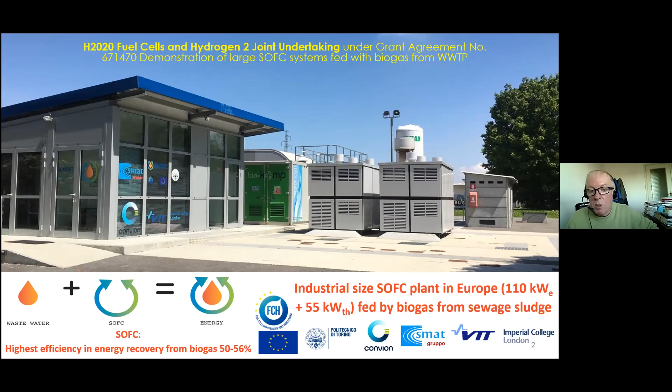I'm talking about efficiency - electrical efficiency specifically, which is very high. I will show you the results, but we are moving between 50% and even more - we have reached 58% electrical efficiency from biogas to AC electricity. At this size especially, this is an impressive result for people expert in electrical production.

This is the plant. It has been installed in an already existing wastewater treatment plant - we did not build the wastewater plant, but the solid oxide part. So from the gas holder on, there is the new plant you see in the schematic. First we have to treat the biogas, because it contains contaminants that can contaminate the catalyst of the fuel cell anode. So there is a first biogas processing system that I will show you.

Then there are the fuel cells - 3 modules of fuel cell. I'll just say that at the end we were only able to install 2 modules, not 3. It's a long story, not significant for today. So in place of 3 modules we have 2, but the concept is the same - producing electricity at high efficiency. For all the modules, there is a recovery of thermal power.

The thermal power is given to a first loop with water and glycol-ethylene that exchanges with a secondary loop, in which the heat is then given to the sludge before it goes to the digester. So the heat is recovered in order to preheat the sludge, which is a necessary activity in a wastewater treatment plant. So the energy recovery is complete.

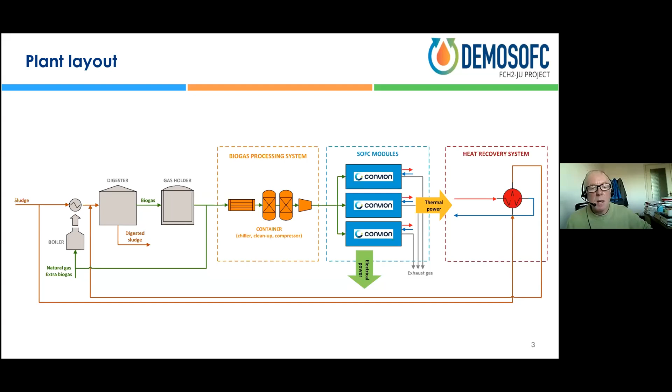The fuel cell also uses compressed air for operation, produced here, and finally there is the electrical connection with the grid interface internal to the plant. I can say that all the electricity is used inside the wastewater treatment plant - economically it's better to self-use the electricity produced compared to exchanging with the grid. It's only an economic balance, depends on the local rules. In Italy, it is better to self-use the electricity inside, and the consumption was enough to absorb all the electricity produced.

And then there is the hot water that has been produced as a recovery, as I said, to preheat the sludge.

I'll show you some pictures about the evolution of the work, because we started from scratch. It's a real industrial installation, so it's a good experience - a fundamental experience for the future, I think.

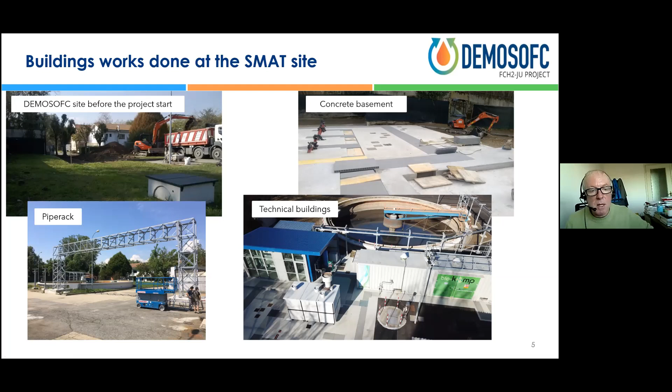So you see some aspects of the work when we built the system. As I said, biogas is a good fuel because it's renewable and contains a high molar fraction of CH4. Still, it contains contaminants coming from the biological sector. The worst contaminants, the ones that can be more dangerous for the catalyst in the anode, are basically the sulfur compounds, mostly H2S, and the silicon compounds, the siloxanes.

On average, we can have in this biogas an average of 28.66 ppm of H2S, quite good, quite low in terms of contaminant content, and around 4 milligrams of silicon per silicon equivalent per cubic meter, with a peak of around 10. So these are the values we have to deal with. Of course, they change during the year because of the variability of the meteorology, but anyway, you have this value to deal with.

So, deal with it in which way? You see the targets for the solid oxide are very strict, somebody can be impressed. For H2S it's 30 ppb, parts per billion, and for siloxane, even worse, 10 ppb. So it means essentially zero, totally cleaned.

I have a lot of experience at the lab level, and I can say that the classical anode of a solid oxide can resist around 1 ppm of sulfur without structural degradation. Anyway, the target was very strict in order to not fail this big demonstration simply for a problem of contamination. So these strict targets have to be reached because of the importance of this plant, but they can be relaxed.

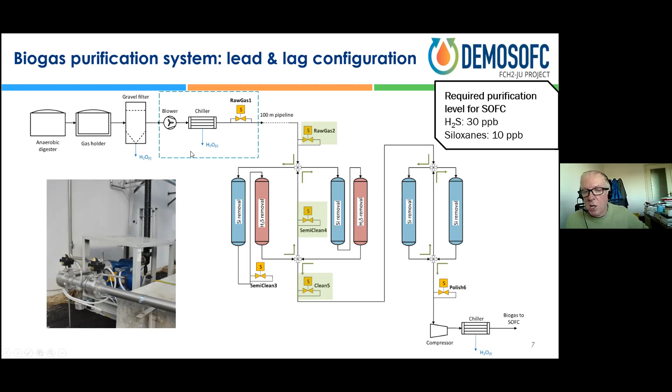Then there is what's called a lead and lag configuration, using activated carbon dedicated to the separation of sulfur on one side and organic silicon on the other side. So there are two vessels in series that separate sulfur and silicon.

Then there are measurement points for the quality of the gas that tell us whether or not to switch. When measurement number 4 shows that the contaminant has slipped across the bed, we perform the lead and lag switch: the lead becomes the lag, and the lag becomes the lead. This ensures continuous operation.

Here is a picture of the vessel containing the carbon, which we designed at Politecnico and built with a company in Italy called Biokomp. And here is the container holding the whole system for decontamination of the gas, so the gas that finally goes clean to the anode of the fuel cell.

Here is an interesting aspect: the electrical connection to the grid, the internal grid of the wastewater treatment plant. You see where the fuel cells are connected to the low voltage line internal to the site. There is also a connection to the external medium voltage line, but as I said, we never used it for economic reasons. Then, of course, the power is distributed to the whole system.

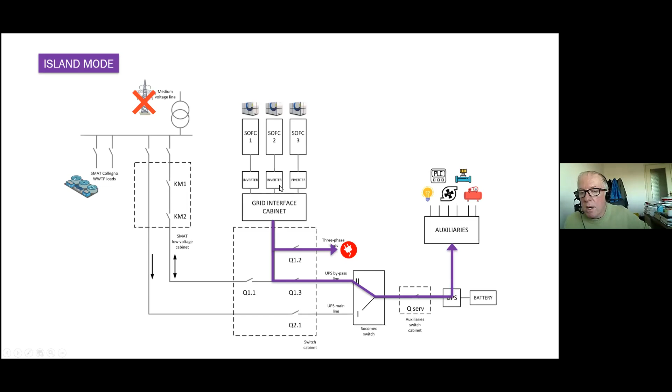The fact that the machine, the solid oxide, can go in operation in island mode means it's possible to go in island in case of a blackout. The machine continues to work, and of course, with the biogas, it can supply the electrical system in island mode. This has been very appreciated by the end user, so it's a good point to outline in this presentation.

Thermal recovery, as I said, is a complete recovery using water and glycol ethylene as a first loop. The exhaust gases are at around 200 to 250 degrees, so at this temperature it's interesting - we can make better use of this high level of thermal energy, because it's not 50 degrees, it's 200 degrees.

Still, the interest in the plant was only to preheat the sludge, as I said. So at the end, we use this 200 to 250 degrees to preheat the water from 45 to 70 degrees, and then use that to preheat the sludge. So you see there is a thermodynamic gap, but it justifies this type of use. We preheat the water at 70 degrees, and then the water is used to preheat the sludge at 40 degrees for using the sludge to make the digestion in mesophilic condition. So this is the recovery.

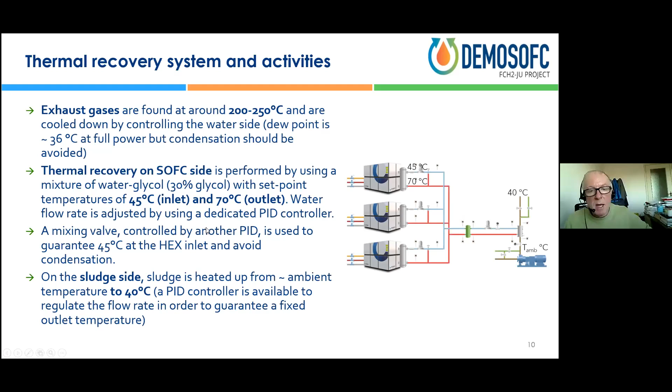I'll show you some details: the pump for the circulation of the water plus glycol. And here you see the tube and tube heat exchanger, at the bottom, where we make the exchange between the water plus glycol and the sludge that is preheated. All has been done from scratch.

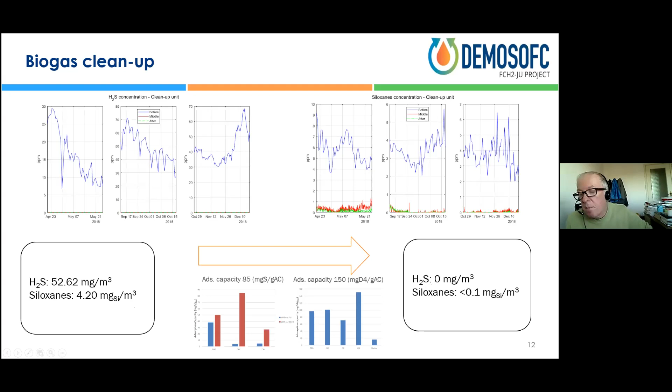Summary - so we go to the results. Decontamination: you know the values we started from, around 50 milligrams per cubic meter of H2S and 4 milligrams per cubic meter of siloxane. This was the average over the year, in the 3 years that we used the machine. The result of the decontamination was 0 sulfur and lower than 0.1 milligrams per cubic meter of equivalent silicon, below the detection limit, let's say. So the decontamination was okay.

And 2% of the time it worked between 55 and 60% efficiency. The top we reached was 58% electrical efficiency. Everybody here who is an expert in electricity production from biogas knows that with an internal combustion engine at this size - I'm talking of 50 kilowatt - the best you can reach is around 40%, or 42% if it's a very good machine. Here we are talking above 50%, with a peak of 58%, okay?

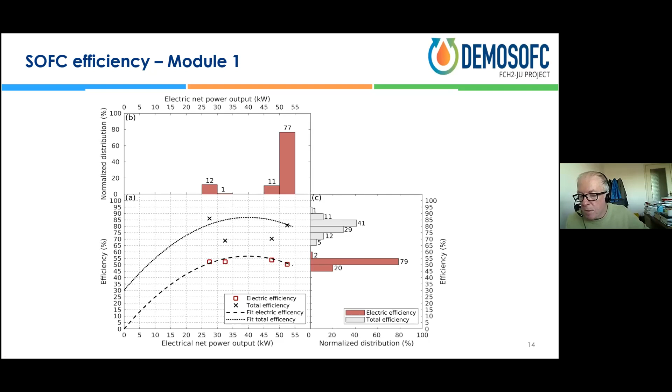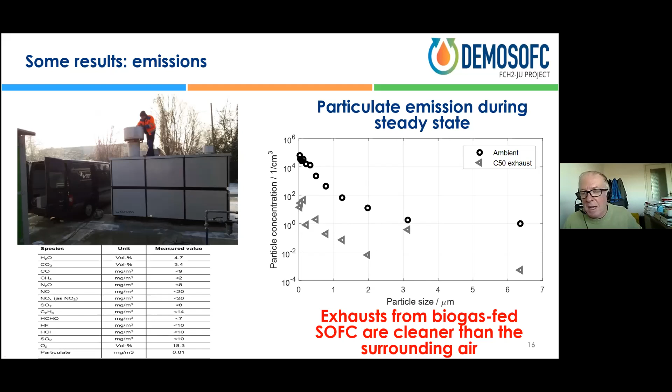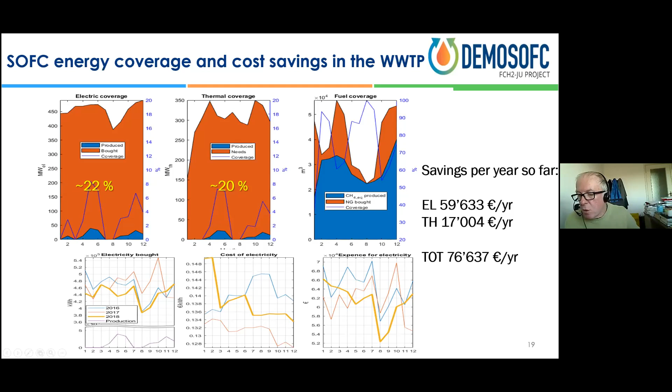So the point is either to produce more biogas with higher merceology, or on the other side, to reduce the consumption inside the wastewater treatment plant. Both are approaches that we are investigating for the future. Anyway, this small plant in Collegno was able, thanks to the fuel cell, to recover around 70,000 euro per year of savings.

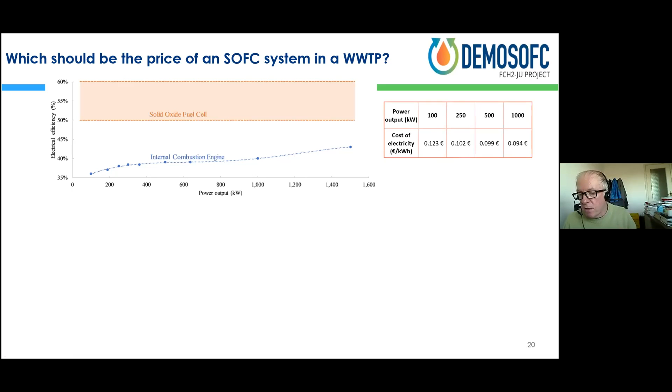This is the cost of electricity produced by an internal combustion engine using biogas. Of course, it depends on the size. 100 kilowatts is around 0.123 euro per kilowatt hour. 1 megawatt is less, 0.094 euro per kilowatt hour. This is the situation with an internal combustion engine. So how much does the cost of a fuel cell per kilowatt, the unit cost, have to be in order to become competitive with the internal combustion engine without any subsidy?

There is not a market. So already now there is a gap to recover of around 1,500 euros. It's not so much. So I have a very good expectation for the future of this technology in this type of application.

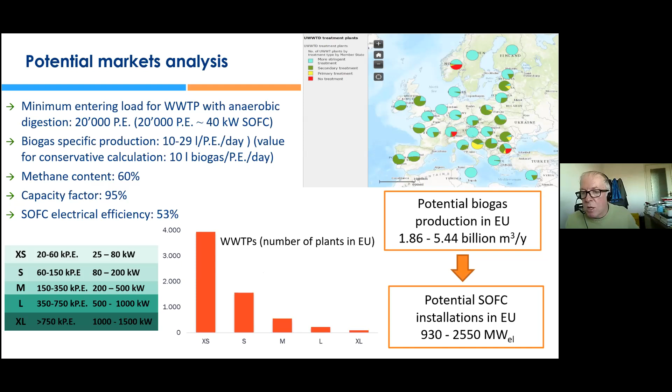So it's an early market, yes, but it's a huge early market. So there's a large possibility to install this type of system in place of the internal combustion engine in the coming years. Finally, I show you a video of this. I hope you can see.

I don't know if you hear the voice, but I can talk over the video. So this is the wastewater treatment plant. This is the solid oxide. Top view, you see the plant that we have built. The first industrial plant in Europe, as I said.

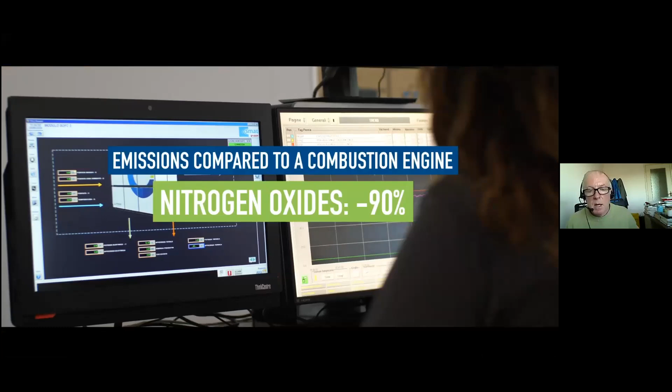So you see the pathway of the biogas going to the fuel cell, the production of energy. So around 100 kilowatts installed. Electric efficiency higher than 50%. This is the control unit. Basically, no nitrogen oxide, no sulfur oxide, as I said.

So to save resources and reduce emissions, this is the target that we have as researchers for the future of energy. And this is one way to reach this type of target. So I conclude here. I hope to be in time.

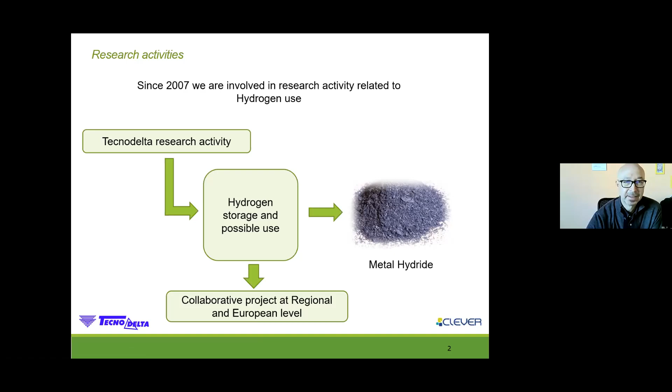In this case, we have worked with metal hydrides, and we decided to put on the market this project, named Clean Drone Eye, because we put in a lot of things that we learned during the years with hydrogen. The aim of this project was to demonstrate the feasibility of manufacturing a drone complete with a hydrogen production system and a refueling station.

Here you can see a drawing of the project. The idea is to use alternative energies to produce hydrogen with electrolyzers. Then we have a system to compress the hydrogen that is produced, and at the end we can put the hydrogen inside a tank that is installed on a drone.

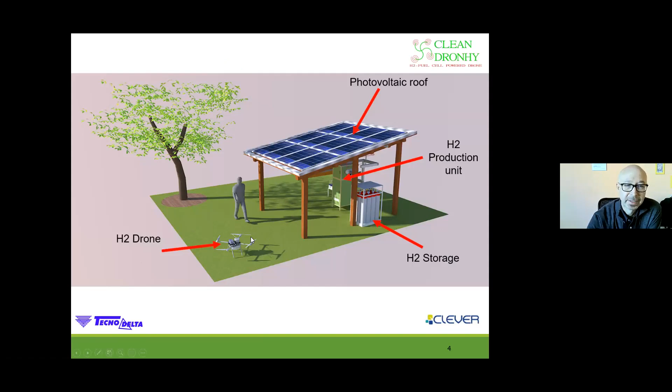The partners. So the project is a collaborative project financed by the Piedmont region. The partners are quite small companies, and we have also the involvement of the University of Torino. So I'm talking as project coordinator. I am part of Tecnodelta. We were in charge of making the production and refueling station.

Then there was another company, named Stones, that was in charge of building the hydrogen drone, complete with the fuel cell. And then another company, a very small company, Microtex, was in charge of the electronic management of the fuel cell.

Then, in the project, the University of Torino with the chemistry department was in charge of studying the compression system with innovative technologies, making tests of these compression systems and making the LCA of the system.

Going into detail, as I told you, the idea was to test the complete chain from production to use. So starting from the production with the electrolyzers, then we put in place a small purification unit in order to have good quality hydrogen to feed the compressor.

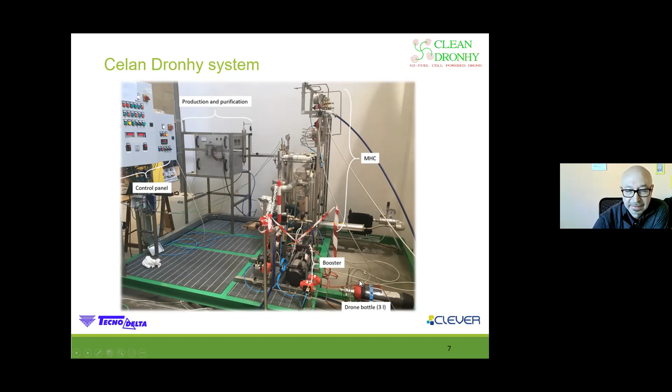The electrolyzers. So the production uses standard electrolyzers with a delivery pressure of 30 bar. The power supply could be a photovoltaic system, as we saw in the first image, or of course directly connected to the grid at 220 volts. Then at the end of this system, we have a purification stage with a cartridge with zeolite inside.

Then at the outlet of the electrolyzers, we have this first stage of compression. Here you can see the complete performance of the compressor, made of metal hydride plus boosters. We reach a flow of 150 normal liters per hour. We filled a cylinder of 3 liters capacity. This is geometrical capacity, and we reach a maximum pressure of 300 bar.

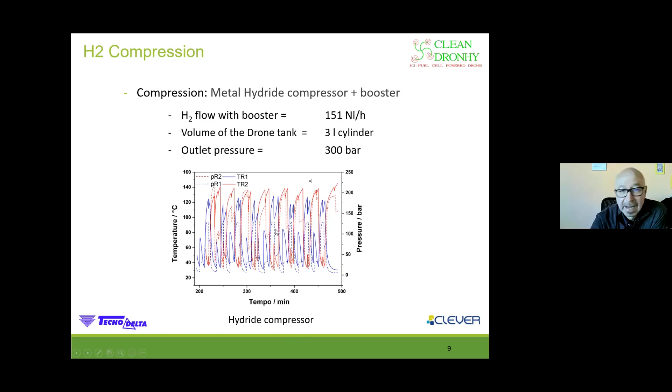Here you can see an image of the hydrogen compressor. Here you can see the monitoring of the pressure of the first stage reactors and the second stage reactors and the temperatures. Now I'm going to show you how the compression works. It is really quite simple.

So, as I told you, we use metal hydrides. We have 2 reactors. We put metals inside the reactors. We have a thermal fluid around the reactors. The hydrogen goes inside the metals. The thermal fluid keeps the temperature under control. In this phase, we are in the absorption phase, which happens at low temperature.

So if we have a look here, we can see which point we are at. We are at this point here during absorption. Hydrogen comes in, we have the phase transition in this phase, and then we have the complete filling of the reactor in this part of the curve here. Then once the reactor is completely filled with hydrogen, we can increase the temperature inside the system, again with the thermal fluid, and then we have the hydrogen desorption.

So we move from this point to this point here, and we have the hydrogen release. As you can see here, from point A to B, we can move to this point. And so we have a stage of compression. As I told you, we have two stages. The first stage has an inlet pressure of 30 bars and an outlet pressure of 130 to 140 bars. Then the second reactor has an inlet pressure of 140 bars and an outlet pressure of 220 bars. So it's quite an innovative system.

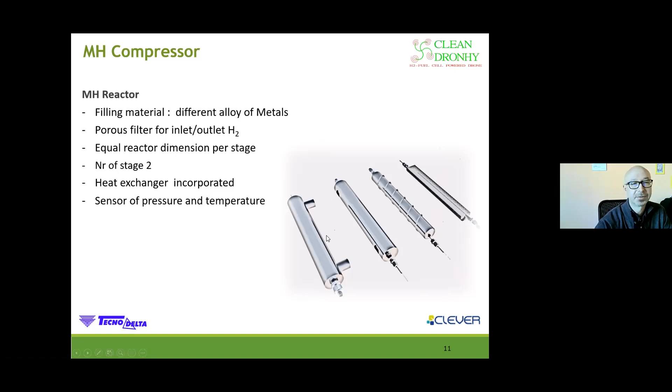The dimensions of the two reactors, first stage and second stage, are the same volume. As I told you, we have two stages. The heat exchanger is incorporated. We have the thermal fluid that comes into this part of the reactors. And of course, we put inside the system some sensors to monitor pressures and temperatures of the system.

At the outlet of the system here, we have the connection with the booster. As I told you, there is a standard gas booster. We have compressed air to drive the booster. The pressure that comes into the booster is 220 bars, and the outlet pressure is more or less 300 bars. That is the pressure we use to fill the tank.

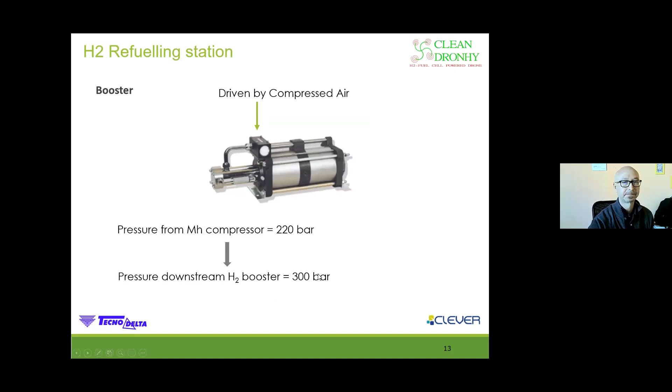About the electricity production on the drone itself, we have used a PEM fuel cell. It is a standard one, very lightweight. We did an analysis on the market and we found that this one is very useful because it is very lightweight, as I told you.

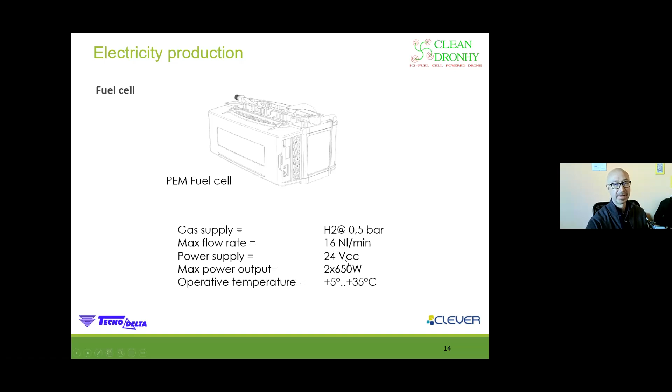The gas supply comes inside the fuel cell at 0.5 bar. We have a maximum flow rate of 16 normal liters per minute, and the power supply that we get from the fuel cell is 24 volts DC. We decided to put on the drone two fuel cells of 650 watts each, and we have operative temperatures from 5 degrees to 35 degrees.

The fuel cells we put on the drone were two. So the company involved in the project, Microtex, was in charge of managing the electricity coming from the two different fuel cells. They developed a system in order to have the same load on the two fuel cells. It's very important to balance the load, not to have too much from one fuel cell compared to the other. So they developed this electronic unit to manage the system.

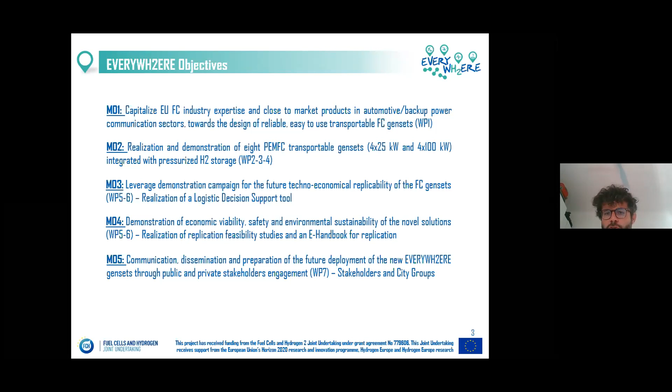Generally speaking, the demonstration campaign, which is the main objective of this project, can be valorized not only for itself but also for other activities, like the evaluation of the logistic feasibility and the logistic campaign to transport the genset here and there, the evaluation of regulatory aspects, and also the evaluation of economic and business modeling to launch these products on the market.

When we started this project, we saw from the beginning some challenges, like the fact that we are going to realize a first-of-its-kind product made by an orchestra of partners, and also the fact that it was important from the beginning to identify what could be the main target market for the exploitation.

I'm telling this because I know this event is very targeted on this topic. For example, we soon identified that there is no competition, unfortunately, between diesel gensets and fuel cell gensets from the CapEx point of view. But particularly looking at specific markets where gensets are used, for example the short-term rental market, which is mostly dedicated to providing power to events, in this type of market where the CapEx, the capital cost of the system, is not so heavy, it is possible to have a remunerative business model.

Also because, at the end of the day, in the final cost to the end user of the genset rental, the cost of CapEx and its amortization and depreciation is really a minimum part, because the major part is logistics, shipping, fuels, etc. In this type of contract, for example, our EVERYWH2ERE genset can have a higher cost of only around 10%, but providing real added value in terms of reduction of emissions towards zero and a reduction of noise and bothering.

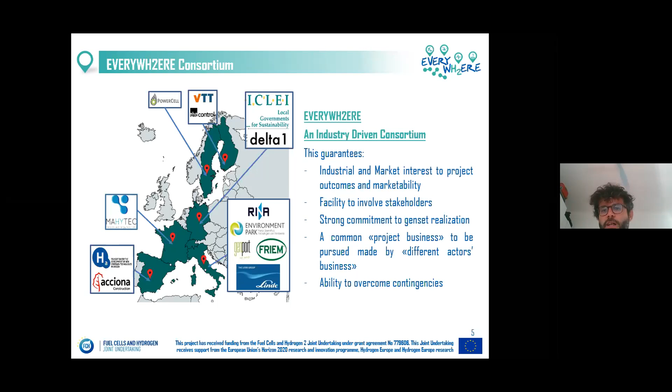Here you can see also other key partners, like THT Control, who supported us in the mechanical integration of the solution, D1, which is the Green Music Initiative Association, supporting us in promoting the genset at music festivals, and Acciona, who will host some of our gensets at its construction sites.

But why can the Everywhere hydrogen genset be more beneficial than other clean energy solutions? I already said something about this. For example, compared to diesel gensets, diesel gensets have an environmental and social acceptability bias, but at the same time they are more reliable and can operate for extended runtime.

If we look at current market solutions, the main competitor is a battery-based containerized system that has one main issue related to extended runtime, since replacing and refilling can take so much time. So from this point of view, the fuel cell-based hydrogen system can be a sort of compromise between a battery-based solution, which is clean but has some bias, and the diesel one. In this sense, we started to think about guaranteeing easier operation in terms of regulatory aspects.

We started to think about how to structure our system, how to structure our genset, and we thought about having something quite easy to be installed, plug and play. So, for example, a distribution socket panel very similar to the diesel genset one, and we thought to operate with a two boxes solution, one box related to the hydrogen storage and one box related to the fuel cell subsystem as it is. We planned and designed it on paper.

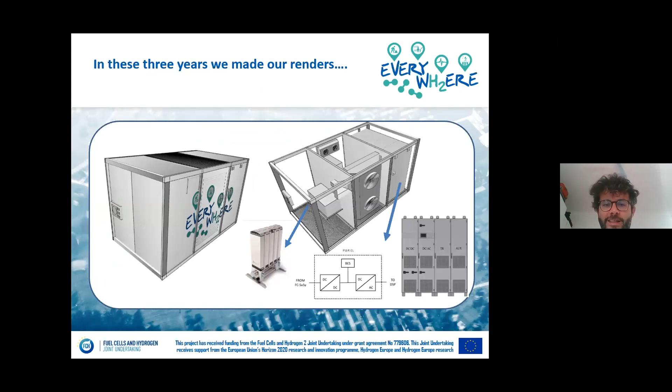As you can see, it is divided into 3 rooms: one dedicated to the fuel cell, separated from the power converter one, with a room in the middle where the thermal management system is embedded. We thought about it via render, but we already realized the first 2 prototypes that you can see in this picture, and that you can visit virtually, unfortunately so far, on our website, www.everywh2ere.eu, where you can make a visit of our genset.

As you can see, we are talking about something between a 10 and a 20 feet container, very similar, particularly in terms of distribution socket panel and interaction with the end user, to any other type of diesel genset on the market.

It's also something easily transportable by a truck. This genset, the first box, is directly connected to the second box, which is a bundle of pressurized hydrogen storage able to operate up to 525 bar, and easily refuelable by a gas truck or even, in presence of pre-cooling, at a hydrogen refueling station.

So where we are now: as you could see, we have realized the first 2 prototypes. We are currently realizing the following one and finalizing the commissioning tests of the first 2 prototypes, because we would like to use them in demonstration, since demonstration is crucial.

As I said, we will perform the first test in summer 2021. Unfortunately, due to the pandemic situation, we couldn't start them earlier, but we are very motivated to start since summer 2021.

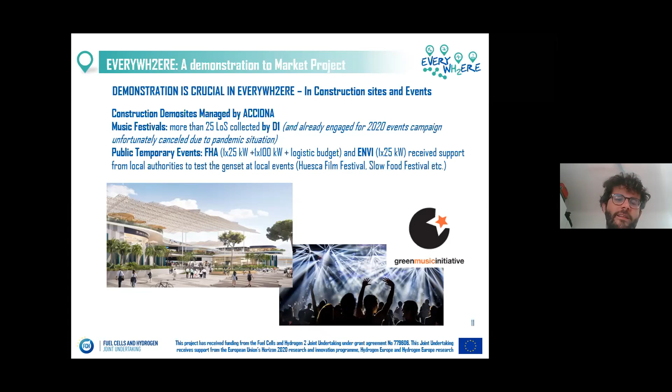So what I would like to say today is that it's very important for us to get in contact with you, not only to know more about your interest in our genset, but also to understand if you would be interested to use our genset next summer 2021, but even in 2022 and in 2023, because the project, as you know, will go farther up to 2023.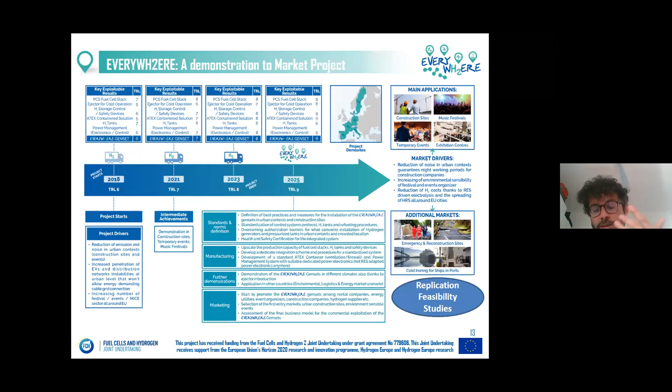So it's very important to contact us, not only to host the demonstration, but because, as I said, the demonstration is very crucial to bring our solution to market as soon as possible. We are targeting 2025, and we are motivated to do so because we are already receiving a lot of expressions of interest.

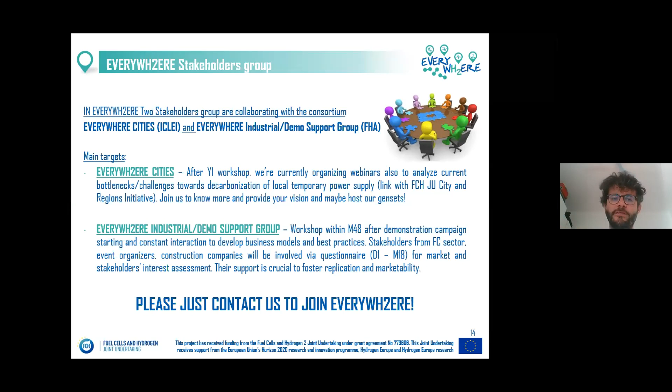So please join us, contact us via our website, because there could be the possibility to host our demonstration, but also to participate. For example, if you are a public authority, a consulting firm, or a research institution connected to cities, also join our Everywhere Cities working group, which is studying, thanks to ICLEI support, how to facilitate from a regulatory and policy point of view the use of our Everywhere genset in European cities. Here are some activities we are doing thanks to the Cities and Regions Initiative with ICLEI.

So please, if you would like to join us, get in touch with us, follow us on social media, follow us on our website. And if you would like to host a demonstration, feel free to contact both of us at RINA and at Environment Park. Thanks a lot for your time.

Thank you, Stefano, for your presentation. You really showed very clearly that, unfortunately, environmental advantages of technologies like hydrogen technology do not automatically mean that these technologies are used and widely applied. This does not mean that all barriers are automatically solved. You clearly talked about social acceptance, regulatory barriers, economic aspects. This is why the identification of entry markets for hydrogen technologies and demonstration, as you clearly told us, is very important, and demonstration is a crucial step. On our side, we can confirm that from our observatory, private and public organizers of events are really interested in this possibility. So we hope that we will soon see the first results of this demonstration project.

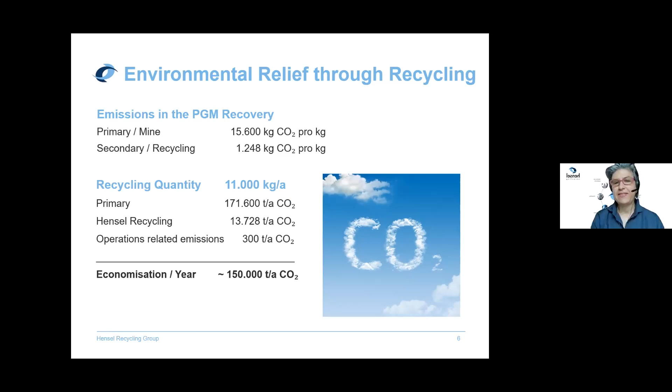We made a small contribution to this recycling, and you can see it here. It is equivalent to 11 tons of precious metals that we recovered, mainly platinum, palladium, and rhodium, from exhausted catalytic converters. This, of course, reflects in a reduction and economization of the overall CO2 emissions, because the secondary recycling of precious metals also produces emissions, but they are largely inferior to the ones produced by the primary source. This is equivalent approximately to 150,000 tons per year of CO2 less.

Coming to the topic of today, I would like to offer you an overview about the chances which the market hopefully will provide for recyclers of fuel cell components.

So Asia is dominating in this scenario. Europe shows its main producers, like Daimler Chrysler, introducing a fuel cell electric vehicle plug-in battery hybrid, and BMW is a little bit more cautious, moving towards fuel cell electric vehicle deployment. But between these regions, there is a full supply chain from catalyst through to recycling, and European players, in our opinion, may find it hard to gain a stronghold in these regions.

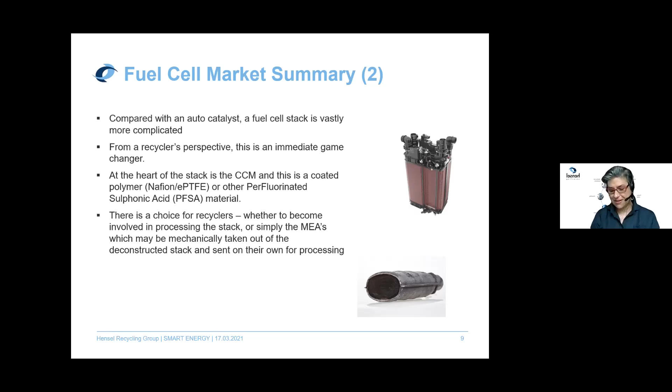The upshot of all this is that the recycling process will be very different to what is practiced today. We think new relationships, partnerships, and expertise will be required to stay in this game of processing automotive PGM. It will take some time for this to be put in place, and the best time to begin is now. That's one of the reasons we are here today with you.

In the next slide, I am offering you an overview again of regional markets, in this case Europe and North America. Asia, as we have seen before, dominated shipments in 2017 with almost the totality of production, and Europe is very much behind, at least in terms of megawatts.

But it is true that in megawatt terms, Asia has always competed for the lead with North America, which enjoyed almost half of the fuel cell market by megawatts. Asia sat in second place with 45%, although its actual production share is higher, and some of that is being exported.

Coming to the recycling opportunities from a regional perspective, the figures we have published so far relate to domestic sales, but exports from Asia are increasingly significant, especially towards North America and to a growing degree also Europe. This is very important for us because, from a recycler's perspective, the country of shipment matters for production scrap, but the country of sale matters more for recycling.

In the country where these products are going to be sold, we have the best chances of doing business with the end companies. On this basis, the vast majority of opportunity currently lies outside Europe.

Many of the stationary projects are based on PAFC, whereas in North America the deployment of SOFC seems to dominate. Therefore, the Asian region has opportunities for PGM recyclers, both in PEM fuel cell transport units and PAFC stationary units.

I must add, perhaps I should have said it before, that we at Hensel Recycling are actually focusing strictly on PEM products, because our industrial core is the recovery of platinum group metals, and we are not interested in technologies that do not bear precious metals to be recovered. So our focus is a little bit of a tunnel focus on PEM fuel cells, as we see from this other slide.

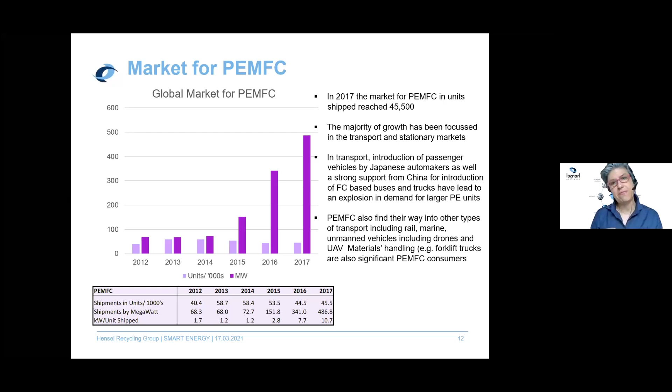Important for us as recyclers, the amount of platinum on a PEM is directly proportional to the power output, and therefore a higher amount per unit is a positive factor for recycling economics and revenues. I think my colleague Henning Hoot will be able to give you a better explanation in the B2B session about what is profitable and what makes sense to recycle.

Well, I think this slide is very simple. The PGM value dwarfs and minimizes the other components. Platinum is worth 1,000 times more than cobalt, for instance.

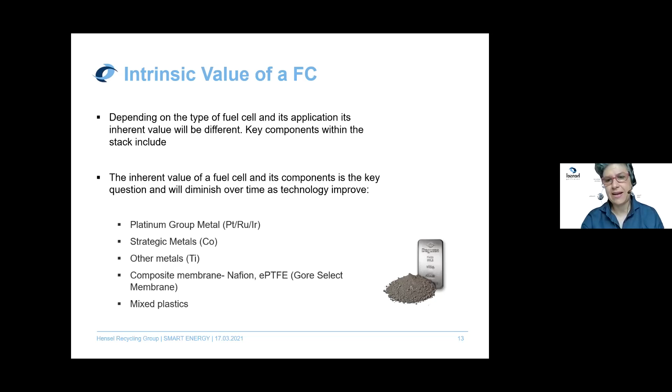And we tend in our strategy to stay focused on the recovering of the PGM, trying to avoid disposal costs for other components. And this is why it is very important, it is essential, paramount to find good connections and good networking for all other components that may be recycled or destined to other uses without having unnecessary waste production.

Right. I think the previous slide is even better explained by a present. It is clear that we need a route to sell, for instance, cobalt, as it is unavoidable when processing transport MEAs. And we hope, and it looks like there might be a strong future market for the recycled Nafion. The recycling of Nafion is one of the things we are focusing on in the BEST4Hy project as well.

A partnership with a company that has that supply chain could be a big advantage. A partnership that, for instance, has a good knowledge in solvent separation for this goal to be attained. And approaching the recycling of whole stacks and the fee calculation of treatment based on disposal costs to third parties is, of course, mandatory. Alternatively, one should avoid stacks and only accept disassembled scrap MEAs.

But as a whole recycler, we see it is difficult sometimes to discriminate and to say, no, we only take this. Of course, we need to have a strategy for that. But now we are, let's say, training a lot, and we are training with full stacks, preferably.

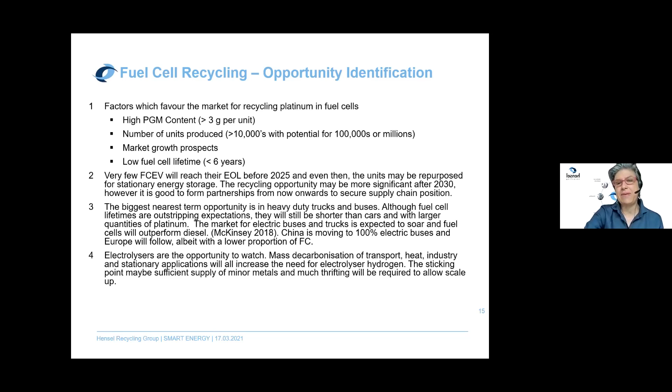As I said at the very beginning, we talk about a starting market around 10 years from now, more or less, because we don't see it coming before that, if not in very small streams. And the biggest nearest term opportunity is in heavy trucks and buses, because they are likely to be the applications that are going to be used at the earliest, as you can see here.

We have, this is very easy, four main areas of business opportunity. And the first one, as I mentioned before, is represented by heavy-duty mobile systems. The second, stationary applications. The third, electrolyzers, and the fourth and last, fuel cell electric vehicles. So passenger cars are going to come at a later point in our view.

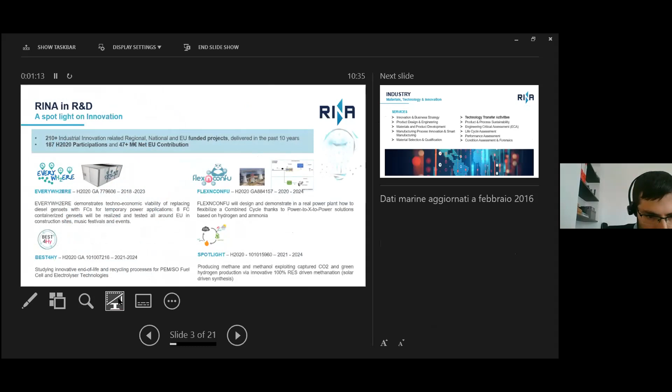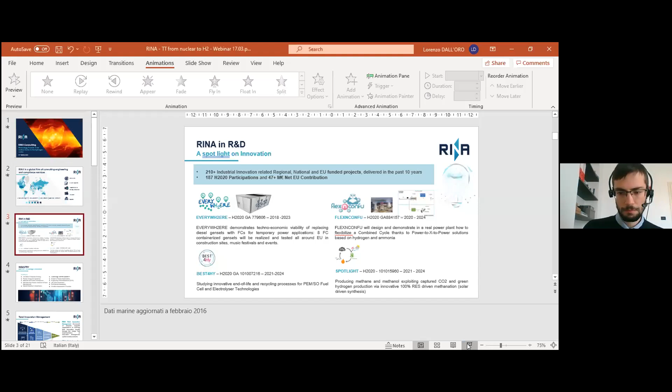Excuse me, Lorenzo, can you just push on the display settings and duplicate presentation so that we see the full screen? Okay, sorry. Yes, I can. No. Sorry, just trying to stop share. Sorry for this. Maybe now it's better. Now it's okay. Okay, sorry.

So RINA, as I was saying, is active in these sectors. RINA has also been active for many years in R&D projects. I reported, just to mention them, the projects currently running in the hydrogen field, and BEST4HY already presented during this webinar, but also FLEXnCONFU and Spotlight. But the focus of today will be our technology transfer activities.

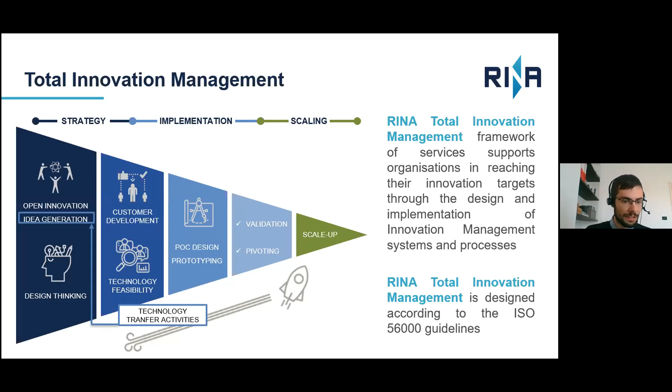This is one of the services we actually offer to our customers, particularly my business unit, Materials, Technology and Innovation. In our Total Innovation Management services, we support companies from idea generation through the scale-up of their products, and within the idea generation, we also use these portfolios of technologies identified in the nuclear field, but also in other fields, to identify possible technologies and possible solutions.

Starting from the experience we had with the European Space Agency, we were technology brokers for them for almost 20 years. We developed a methodology for technology transfer, and we adapted this methodology to the fusion sector. Basically, there are two large technology transfer activities going on. One for EUROfusion. EUROfusion is a large consortium that includes almost 30 research organizations and universities all across Europe, and develops, supports and coordinates fusion research activities on behalf of the European Commission Euratom program.

On the other hand, Fusion for Energy is an EU organization managing the European contribution to ITER, the world's largest fusion experiment, which is building a large tokamak in Cadarache in southern France. So based on these large networks of organizations and companies, we are able, with the support of a network of brokers all around Europe, to map the technologies that are developed in this context, and to select the ones that could be potentially transferred to other sectors.

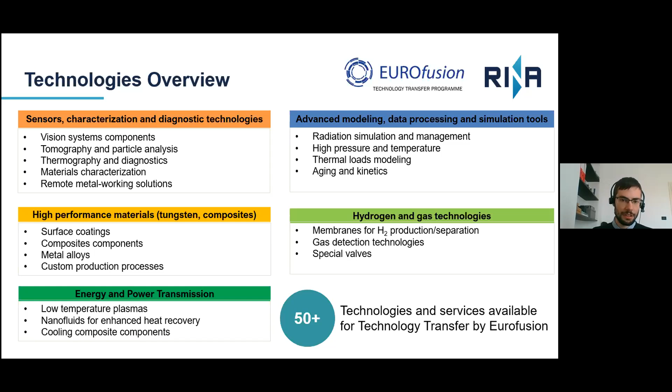As you can imagine, the research and development that fusion is facing is very, very important, and many breakthrough technologies need to be discovered and researched, and there is a huge potential for these technologies to be applied also outside fusion. The same has been done for Fusion for Energy. The categories are very similar. Here we are speaking of very high TRL technologies because all of them will be installed in the ITER running machine. So these are very high TRL technologies, and we're in direct contact with all the technology providers providing this type of solutions.

But why is hydrogen related to fusion? The fusion reaction inside the ITER tokamak reactor will be powered by the 2 isotopes of hydrogen, deuterium and tritium. The fusion of these light hydrogen atoms produces a heavier atom, helium, and 1 neutron and a large amount of energy. So you can see here on the right the closed cycle in which the deuterium and tritium, the fuel of the reactor, will be used.

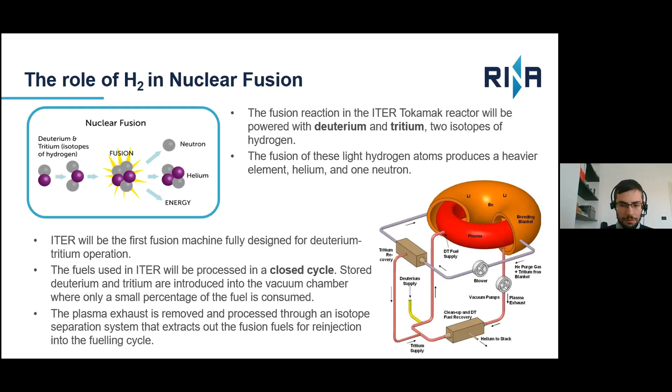I'm going to just give an overview of some examples of fusion-derived technologies that have already been used for the hydrogen domain. As I said, decades of international cooperation among major research institutes on these topics, a lot of effort on R&D, and a strong technical background.

Some examples of fusion-derived technologies include selective membranes to separate hydrogen that are used in the ITER machine to separate tritium from the fuel flow, but also sensors to measure hydrogen partial pressure, libraries to study the dynamics of hydrogen transport and the modeling, a lot of software for simulations, materials that need to withstand such demanding and extreme conditions, and also components, valves, tubes able to withstand these conditions. I'm going to show you some of these examples with a little more detail in the next slide.

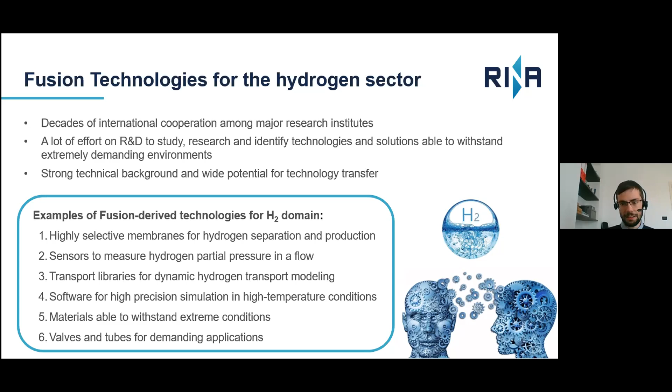We selected among the technologies the hydrogen permeation barriers developed by Jülich Research Center based in Germany. So basically, barriers that are deposited with a method of deposition through a magnetron sputter deposition device. This allows to obtain a very interesting property of these layers of coating, providing high thermal stability and very low permeation to the tritium in this case at high temperature and pressures. This is the first example.

The second one, transport libraries for hydrogen transport modeling. This has been developed in Spain by Empresarios Agrupados in close collaboration with CIEMAT. These are basically modeling software able to study in detail and simulate the processes involving hydrogen flows.

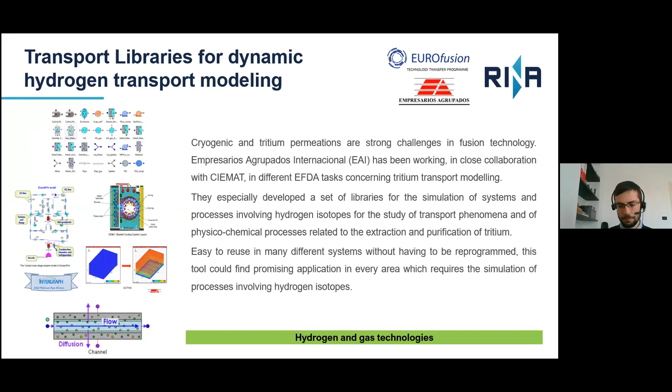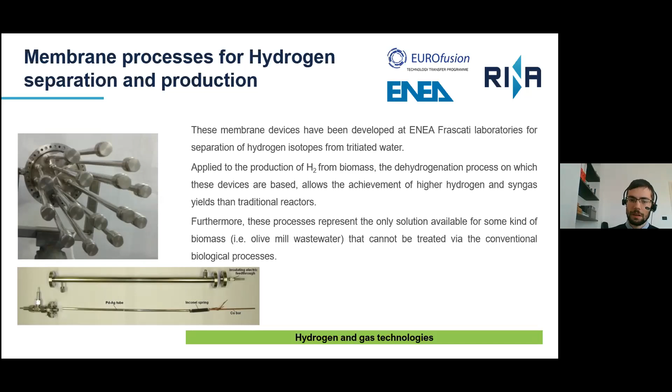The last one, probably the most interesting one, are palladium-silver membranes developed again by ENEA. These membranes are realized in bulk metal and were developed for the separation of hydrogen isotopes from tritiated water. They were applied in a project to the hydrogen production via reforming of methane that was obtained from biomass.

So these membranes allow to obtain very high purity hydrogen and to obtain very high yields thanks to their selectivity, and used within this system via reforming of methane allows to produce very high purity hydrogen to feed high efficiency PEM fuel cells.

This is just one example of a success story derived from the collaboration between a fusion-derived technology and an industrial company that actually, in collaboration with ENEA, developed this type of application. So, as you see in the previous slides, there are many technologies, many solutions that have been identified.

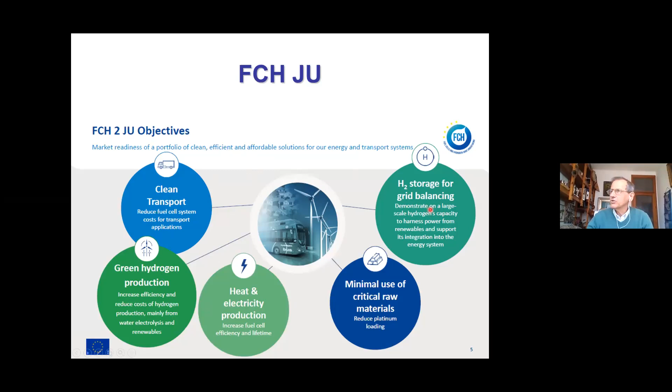The pillars of the FCHJU are related to energy, transport and cross-cutting, and today I would like to stress something related to energy itself, in particular a point related to hydrogen storage for renewable energy integration. This is one of the main goals. There are a lot of projects, and this is basically the scheme of FCHJU related to production and storage, and there is a specific goal related to this aspect.

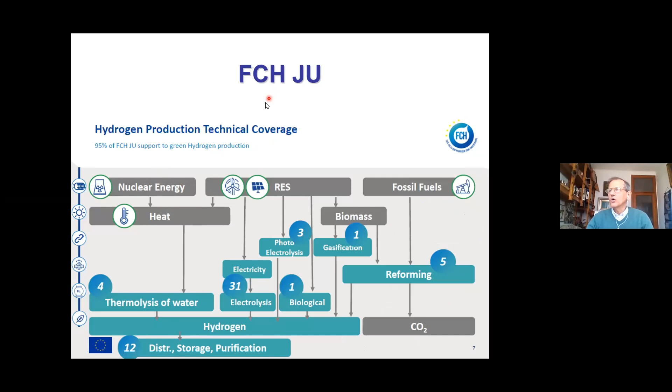This topic, as Luca was saying, is very much considered at our own university, and I'd like to stress that storage is just a step in the whole hydrogen value chain, but in some sense it's quite crucial, either for handling the hydrogen that is produced by the electrolyzer, but also to be delivered to the hydrogen refueling station.

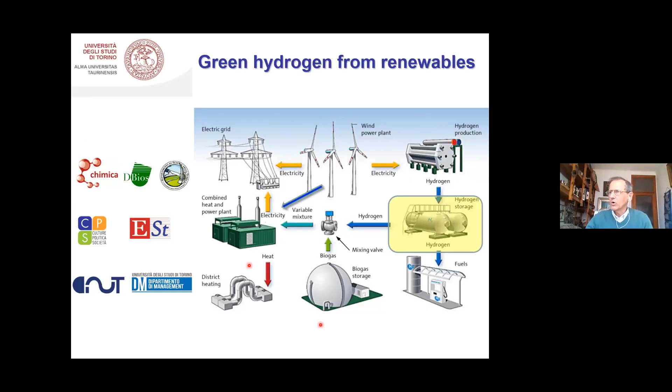In our university, we have several departments that are engaged in the whole value chain. Today I would like to stress what has been done in this specific topic.

When we talk about hydrogen storage, basically there is a series of requirements. One point is the high gravimetric and volumetric density. Gravimetric is crucial for transport and volumetric is crucial for stationary applications. It's quite crucial to have temperature and pressure rather close to ambient conditions in order to avoid any trouble in managing.

The system needs to have a very high number of charge and discharge cycles. Everything has to be done quite quickly, and it has to be safe and possibly quite cheap.

The second approach is to use a so-called cryogenic liquid, to put hydrogen at a very low temperature. This is very good because it's able to produce a huge amount of storage, but there are a lot of energy efforts for obtaining that. It's the same for gas, because compressing requires a lot of energy.

So one possible solution followed in this project is to use what we call carriers—simply some materials, solid or liquid, where hydrogen can be stuck and then taken back in a second step.

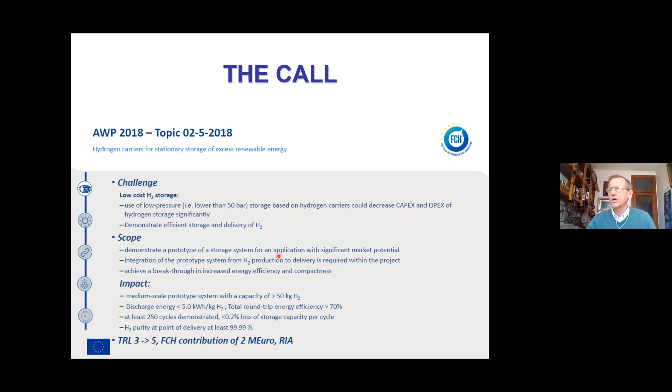For this specific matter, the FCHJU in 2018 put out a topic actually related to the use of hydrogen carriers for the stationary storage of excess renewable energies. There were a lot of important points in the call that I will discuss quickly, but this is just to stress that quite often the call has very clear goals, and it's quite important in the project to stick to the goals required by the call.

In order to answer the question from FCHJU, we put up this consortium that developed the hydrogen carriers for renewable energy storage project, called HyCARE. The goal was to try to answer different questions: to combine hydrogen carriers with phase change material.

I will come back later to this point. The main point is to try to reduce the footprint of the system needed for storing renewables, and the goal is to put carriers into large-scale applications. This is being done by combining research centers with companies, and the idea is to perform a test system in Paris, in the living lab of ENGIE.

The goal, of course, is to provide this test for industry, for companies, but also for regions and cities. And of course, the goal is to demonstrate that it's working and then to be exploited in the future.

So this is basically the consortium. We are coordinating the project. What I'd like to stress is that we have a couple of big companies. ENGIE is a very big French-based electricity and energy company, and GKN is a company related to metallic powder. We have Tecnodelta, who already presented the project today, and another small-medium enterprise in Germany. And then we have different research centers, including Environment Park, that is hosting this meeting.

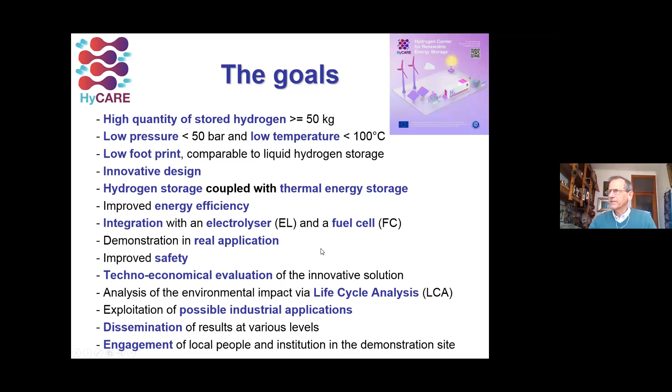But let me go to the core of the concept. The idea is to have a tank containing a carrier, which in this case is a metal hydride. You have hydrogen coming in. When the hydrogen gets into the metal, it produces heat.

And this heat, instead of being dispersed, is stored in a phase change material. So the heat is there. And then when you need the hydrogen back, you basically use the heat that has been stored in the phase change material, and you provide this heat to the metal hydride. Because it is receiving this heat, it increases its temperature, and then it delivers hydrogen. So at the end of the day, you are combining the two, and the efficiency is very much improved.

From the technical point of view, with a metal hydride you basically have pressure and temperature. When you have low temperature and high pressure, you have a hydride, so hydrogen is stuck to the metal. But when you have low pressure and high temperature, hydrogen is out, in the gas phase, and the metal is alone.

And of course, you need to move from one side to the other, playing together with pressure and temperature. And when you do this step, at the end of the day, you have a change in heat. And this heat is what is taken up by the phase change material, simply because it is moving from the solid state to the liquid state.

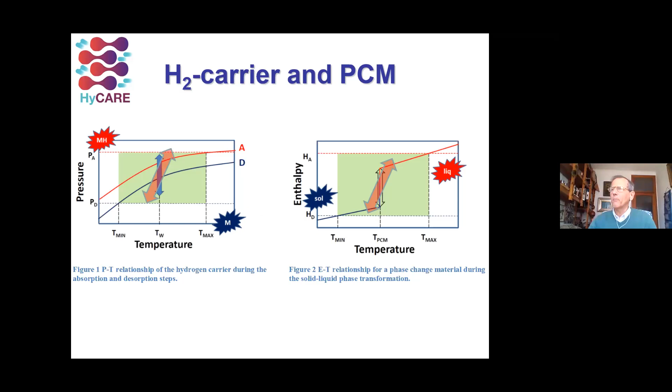So this is basically the scheme. So let me quickly describe the different steps of the project. At the beginning, the matter was to find the right carrier. We decided to work on the titanium iron system, playing with different suitable substitutions. This is an example where we analyzed possible substitution with manganese and copper.

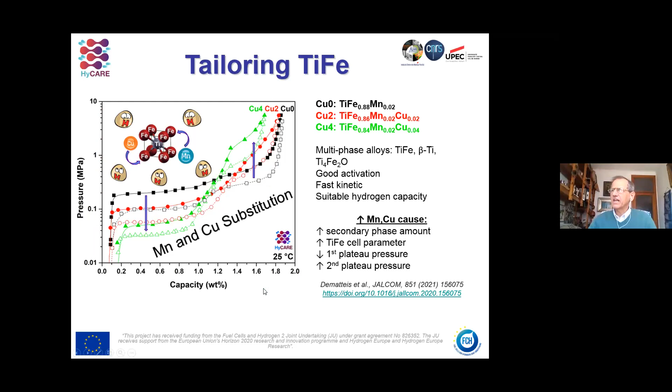This is a typical pressure versus capacity curve, what is called a PCT curve. The idea is to find the right pressure and temperature conditions in order to reach the goal.

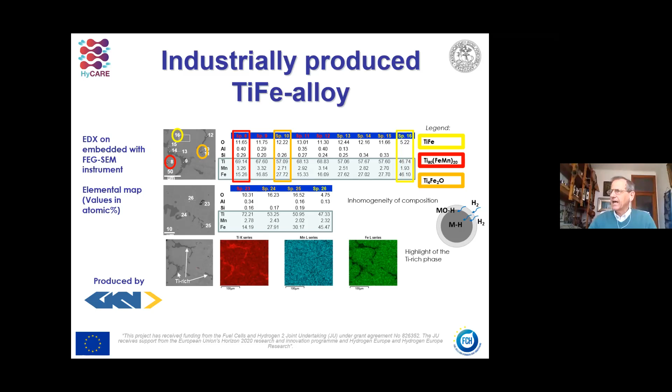Once the alloy material has been selected, we were able to move up to industrial production. In order to store 50 kilos of hydrogen, since the gravimetric capacity of this material is not far from 1 weight percent, we need at least 4 or 5 tons of this powder. This was prepared and analyzed in the lab to check the quality of the powder itself.

One of the key points was to find the right condition, what we call the window, based on both temperature and pressure. This window has been defined between 30 bar and 2 bar, with temperature lower than 70 degrees C. This is definitely helping to improve the safety of the whole system.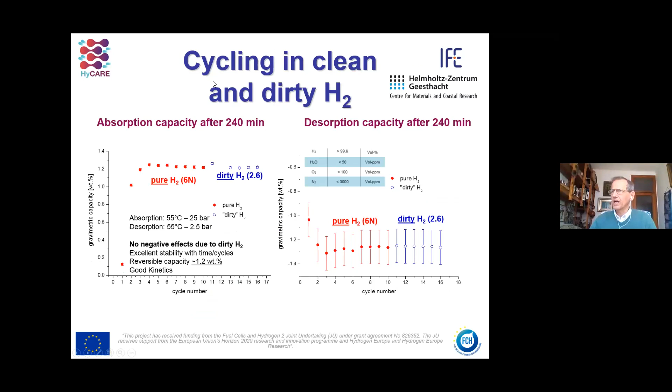The other key point is to be sure that the system works with the hydrogen coming from the electrolyzer. This was checked by comparing cycling of the system with both clean and what we call dirty hydrogen, meaning with some impurities inside, and everything was okay. So basically we were ready to start with the design of the system.

The idea is for the system to be inside a standard container, but in order to reach the very final system, we started by designing a prototype that has already been tested. The prototype was a sort of subunit of the final system, using both iron-titanium based alloys and PCM, with about 60 kilos of alloy and about 30 kilos of PCM.

This prototype system has been designed, and the powder has been combined into suitable pellets. This is the tank for the metal hydride, and this is the tank using the PCM. The two tanks have been connected to each other and have been tested up to now, and it is working perfectly. So there is room for moving to the final, full-sized system in order to reach the goal of 50 kilos of hydrogen.

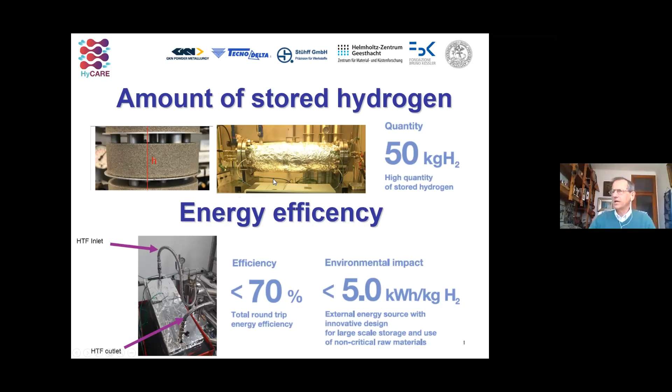Of course, the system is now ready to be concluded. In the meantime, we are investigating possible exploitation, and I'd like to remind you that the European community is providing a lot of support for this kind of approach. We are using such exploitation supports, and the new one is called Booster, which is a very interesting point of support from Europe.

On the other side, there is also a techno-economic analysis of the whole system, comparing this technology with others, and then comparing the possible impact on the environment by performing what we call the life cycle assessment.

Let me conclude that we are ready to disseminate and communicate our project. So please, if you are interested, contact me or have a look on LinkedIn, Twitter, or other opportunities we have from this point of view.

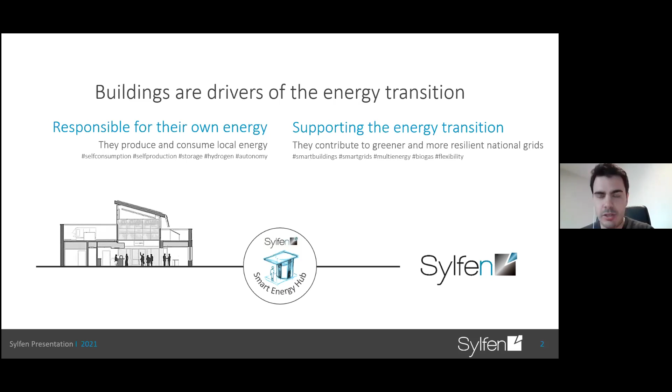So at the heart of the Sylfen technology is this reversible solid oxide cell energy processor, which acts as a two-in-one electrolyzer and fuel cell, essentially. It's 100% reversible technology. In a lot of the presentations we've seen so far, we were either looking at fuel cells or electrolyzers. This is really a two-in-one component, just depending on the way the electricity is flowing and whether we have hydrogen production or hydrogen consumption.

In both cases, so in electrolyzer mode, there is where you are consuming the electricity, and there is a storage and heat and the production of hydrogen. And in the fuel cell mode - the two modes obviously don't run at the same time, it's one or the other - in the fuel cell mode, there is the production of electricity and heat.

Sylfen was based, is a startup issued out of the CEA, which is a public research institute in France. And we've been in existence since 2015.

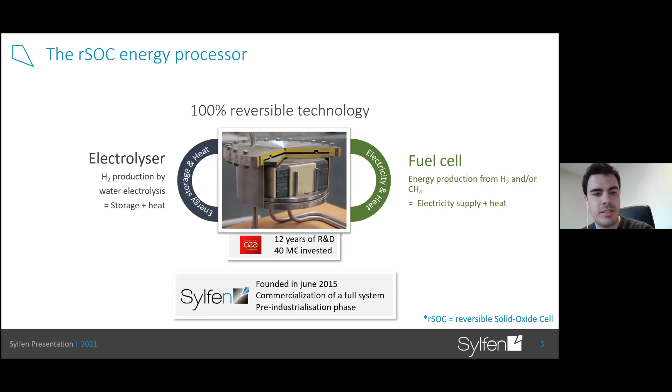This is a diagram to show the interaction of our main product, which we call the Smart Energy Hub, here at the center of the screen. On the left, you have the end users of the electricity or the energy, which can be buildings, sites, campuses, hospitals that have energy needs in the form of electricity, heating and cooling, and mobility, whether electric charging or even hydrogen. The Smart Energy Hub sits itself at the intersection of all these energy flows.

Ideally, you have a local on-site production of renewable energy, mostly in the form of solar panels, but as we'll see, it can be small wind turbines or small hydroelectric plants that provide directly energy to the building, and any surplus will be stored in the Smart Energy Hub.

So the Smart Energy Hub, as presented before, is made up of three core components. One of them is the reversible solid oxide cell that I presented earlier. There is also a battery component - we use lithium-ion batteries and basically take the advantages of the batteries and the energy processor and get rid of the inconvenience of both. And we also have hydrogen storage tanks, which are installed on the outside of the building.

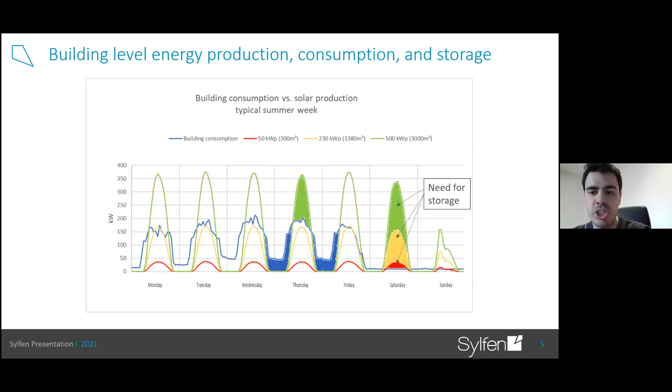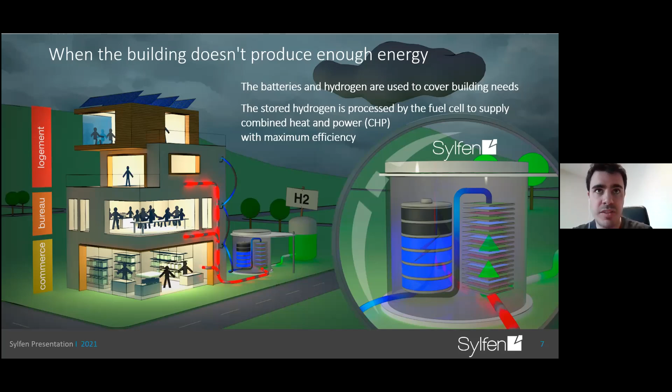At night, or whenever there is not enough energy being produced, we have the opposite: the batteries and the hydrogen will give the electricity back to the building, as well as heat for the energy processor. So we combine it, it serves as combined heat and power to maximize the efficiency of the energy that is produced. A specificity of our technology is that whenever the hydrogen storage is fully used and there is no more...

the smart energy hub is still capable of working with natural gas or biogas, which would be even better. The gas is fed through a reformer in the smart energy hub and then feeds directly into the energy processor, and out of the gas we're still able to run in fuel cell mode and provide electricity and heat to the building, therefore decoupling from the traditional electricity grid. That obviously adds fuel flexibility and reduced downtime for the building.

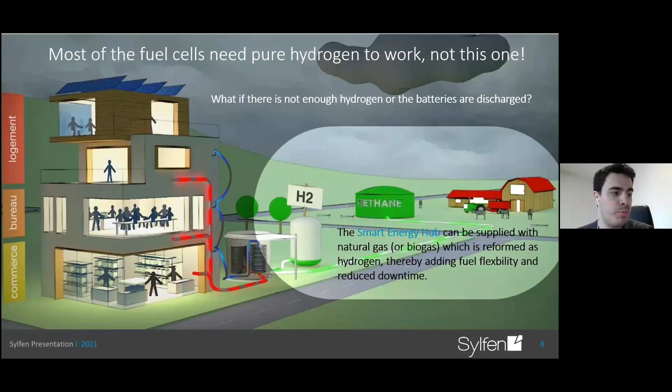I've been talking about buildings, I mentioned an industrial building, but we're really looking at all types of buildings, at least over 1,000 square meters. That's the current offering we have today, between 1,000 and 10,000 square meters, whether they're existing buildings or new buildings, various types - office buildings, residential, industrial. Any entity that needs to consume energy during the day in the form of electricity and heat.

The current offering we have today is for those sizes, but we are working on a new development of the product which will address buildings or campuses that are above that 10,000 square meter limit - so more universities and hospitals that have larger energy requirements.

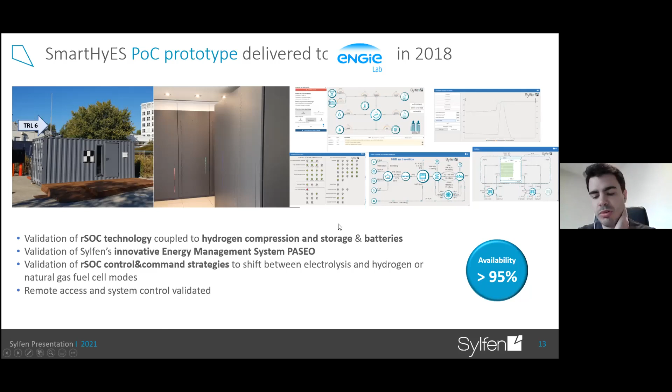We have one residential building in Monaco, another one which is the headquarters of a distribution system operator in northern France. And then these are 3 projects that we're currently working on right now, 2 of them being in Italy that were financed and subsidized by European funding. And specifically, we're looking at this Reflex project in Torino.

The Reflex project stands for Reversible Solid Oxide Electrolyzer Fuel Cell for Optimized Local Energy Mix. So it is based at ENVI Park in Torino. The aim of that project is really to look at how high of an efficiency and flexibility we can operate our Smart Energy Hub, looking at obviously the cost implications of running all this with our technology. We will have different operational strategies as well that we'll be testing throughout the duration of the project.

As I mentioned, we need renewable energy. I mean, it can be used with any type of electricity, but we prioritize renewable energy at the site of ENVI Park. So there is a 16 kilowatt PV plant. You have a picture there. And then you have also a hydroelectric plant of 670 peak kilowatt power.

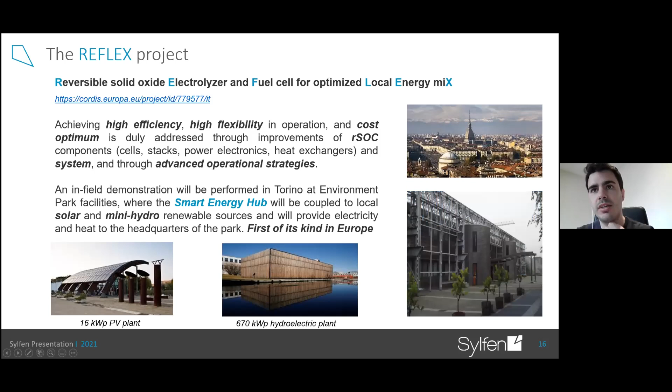This Reflex consortium, so of course there are many partners involved, and so we've listed them as part of the different tasks that they were dealing with. We had the CEA, Elcogen, and DTU in Denmark looking at the fuel cells and the stacks. So I believe Elcogen was providing the fuel cells for the energy processor. CEA was looking at the integration and the stacks, and DTU was running the simulations and the testing through computer analysis.

We had GP Tech and the Universidad de Sevilla looking at the system power electronics. So the batteries, the AC-DC converters, DC-DC converters, and basically anything dealing with the powers. The VTT in Finland was looking at the whole system modeling and the interactions between the fuel cell, the energy processor, and the batteries.

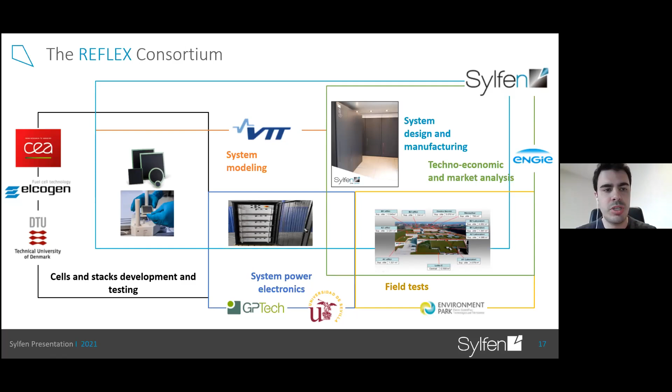Sylfen, we were charged with designing and manufacturing the actual solution, which was integrating all those different components. ENVI Park was providing the site and welcoming us to install the technology on their building and doing some of the testing on site. And we had ENGIE, so the French energy supplier, looking at the economic aspects and the market analysis. So it was really a true collaboration between all those different actors.

I'm not going to spend much time on this slide, but basically we developed internally some models to reconstruct energy profiles on buildings, which is the ProfilBat software. We have ConfigDim, which analyzes the perfect sizing for the solution, and that's kind of the result that we give to clients or partners that we work with. Specifically to the ENVI Park and the Reflex project.

So we were given only monthly and annual data for the energy consumption of the site. So you see that they use electricity, biomass and natural gas, mostly for heating and cooling and domestic hot water. We had the information for the energy consumption, the surface, and therefore the kilowatt hours per square meter, and had some indications about the various buildings.

Through that ProfilBat software, we were able to reconstruct the hourly profiles of those different buildings and see what that looked like. So there on the right, you have in green the energy production, and in black the energy consumption of the site. And you see that, for example, as I mentioned before, these are moments when you have excess energy production over the consumption and are moments where you should be storing the energy.

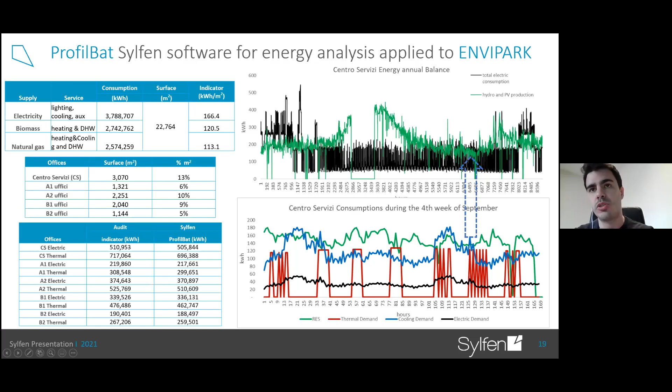Below is more what it looks like on a weekly basis. So over the course of a week, you see the consumption is most of the time lower and the production higher. So therefore there is a need to store the energy. This is what happened when we ran it with our ConfigDim software to look at what is the proper sizing and how much renewable energy sources we should input into our system.

So we had 3 scenarios where we take 25% of the renewable energy on site production, 30% or 50%, and look at the numbers that it gives us through the Smart Energy Hub. We can see that with the 30% renewable energy, you do have slightly less self-consumption, but you have more overproduction, the surplus that needs to be stored. But you can see that if you go too high, then you have too high of a surplus that needs to be stored. And if we are not able to store it, then it kind of needs to be re-injected into the grid and you might be losing there.

The other important factor here is with the 30%, we're using 44,000 kilowatt hours that are produced from the hydrogen that is produced on site, as opposed to a bigger scenario, where you wouldn't be producing as much from the hydrogen. We are reducing the amount of gas that we buy from the grid, and that's really the goal here, so that we can reduce the CO2 emissions from the site.

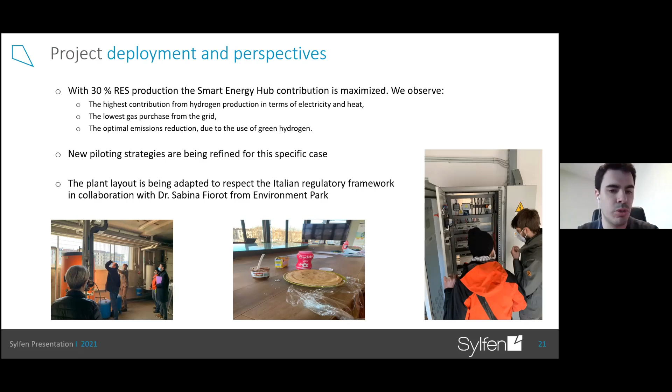I do work closely with Mario Lamagna, who is our Italian contact for this project, and who is also working on the Procida project. So if there are any questions specifically with regards to Italian regulations, I would highly recommend you get in touch with Mario. So that's the end of my presentation.